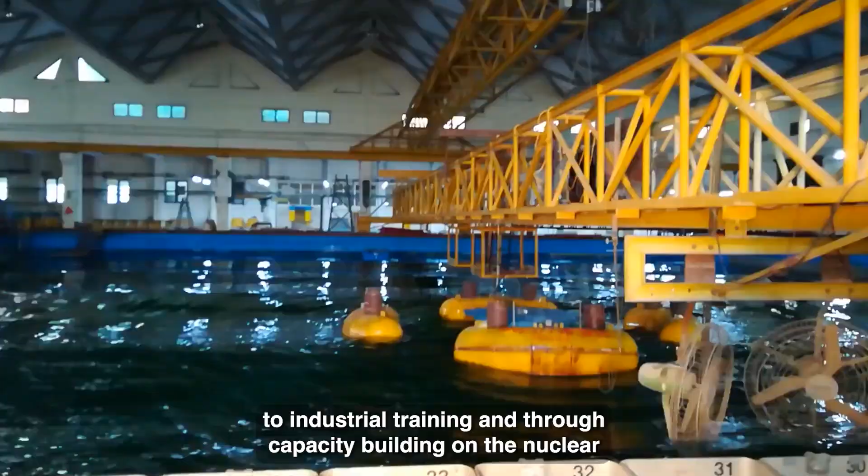This maritime engineering program is a very special, multidisciplinary program with input from mechanical, civil, structural, aerospace, naval architecture, chemical engineering, electrical, electronics, and applied mechanics. It is completely dedicated to industrial training and thorough capacity building in the new trade of the maritime sector. It's a growing economy offering many job opportunities and research frontiers as India grows, and the Blue Corridor initiative planned by the Government of India is one important mission requiring maritime engineering growth in the country. This program caters to that expected capacity building.

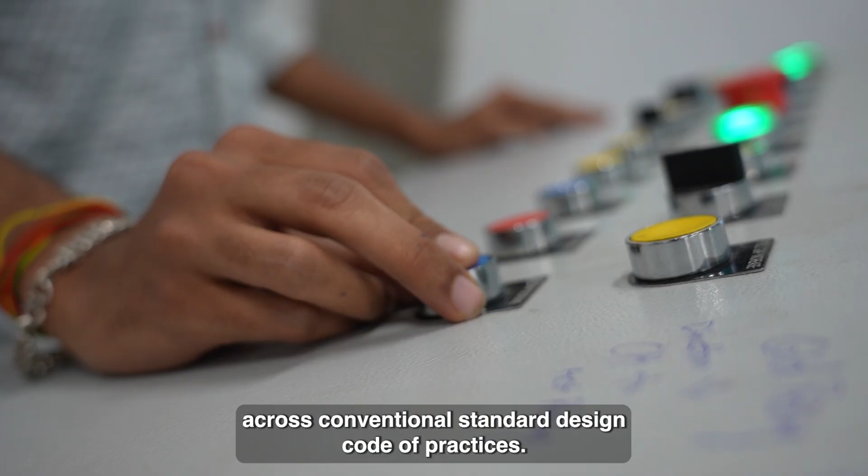This is part of the material science engineering laboratory, which serves as a teaching aid for the maritime engineering program. When we talk about materials innovation in the maritime industry, concrete and steel have been conventional choices for engineers, but now we have titanium vessels and high-speed craft boats made of fiberglass. These are advanced materials that do not fit conventional standard design codes of practice. We conduct box furnace tests, tube furnace tests, vacuum arc melting, induction melting, vacuum induction melting, and vacuum sealing, all present in this laboratory, which is a small segment of the material science laboratory.

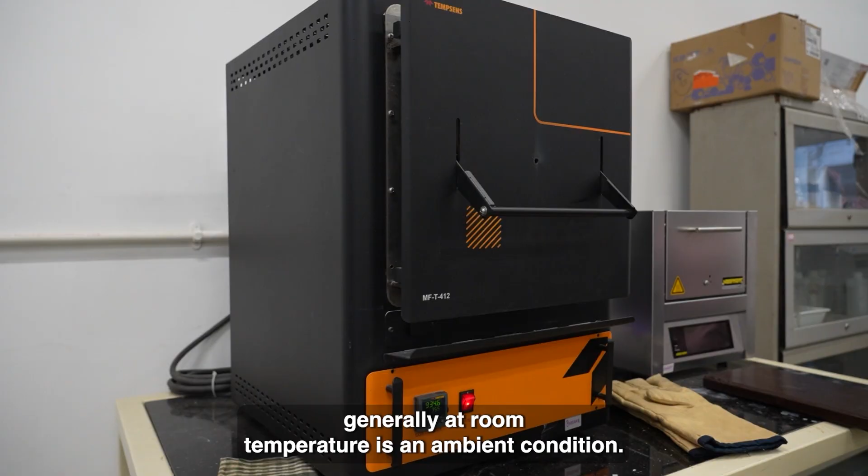A typical furnace here can reach operating temperatures as high as 1200 degrees Celsius for testing specimens. Generally, at room temperature and ambient conditions, mechanical properties do not alter much. As you'll see in the course lectures, the strength of a material degrades when the temperature rises beyond 600 degrees. Therefore, when designing for fire resistance, you must choose an alloying element such that the strength doesn't degrade beyond 600 degrees Celsius.

Welcome to the ambience of the IIT Gandhinagar lecture theatre. This is one of the interesting classrooms where maritime engineering classes will be conducted. We have state-of-the-art projection facilities and good audio-visual recording systems. Once a lecture is over, the system can generate PDF files of the lecture directly, and these can be emailed directly to your email ID. It's a state-of-the-art facility at IIT Gandhinagar where lectures are recorded for life and shared with students immediately.

This is the IIT Gandhinagar library. It has collections of books referred to as standard textbooks and references for the course and program. It also has many online editions of design codes of practice, reference materials, and e-collections of various video lectures from international courses and programs related to maritime engineering.

We will now take you around the advanced material manufacturing units, so you will see the state-of-the-art facilities available at IIT Gandhinagar. Welcome to the program to join MTech and PhD at IIT Gandhinagar Maritime Engineering. Please try to enjoy and take advantage of this to the maximum. Welcome to the program, and welcome to IIT Gandhinagar.

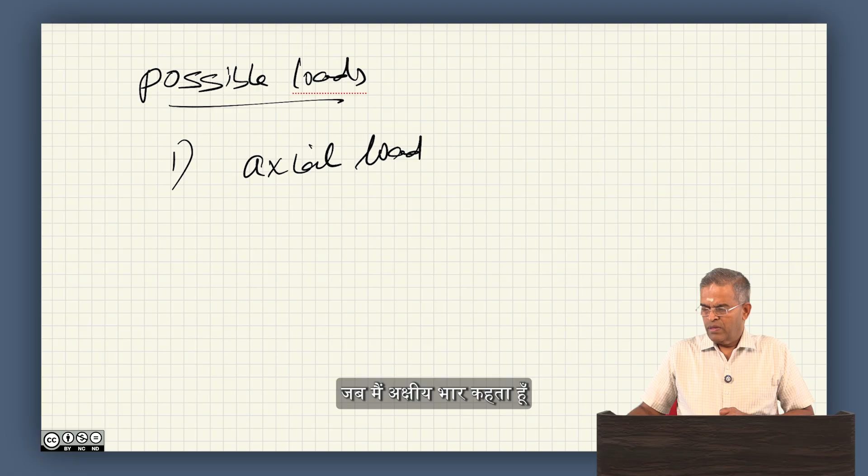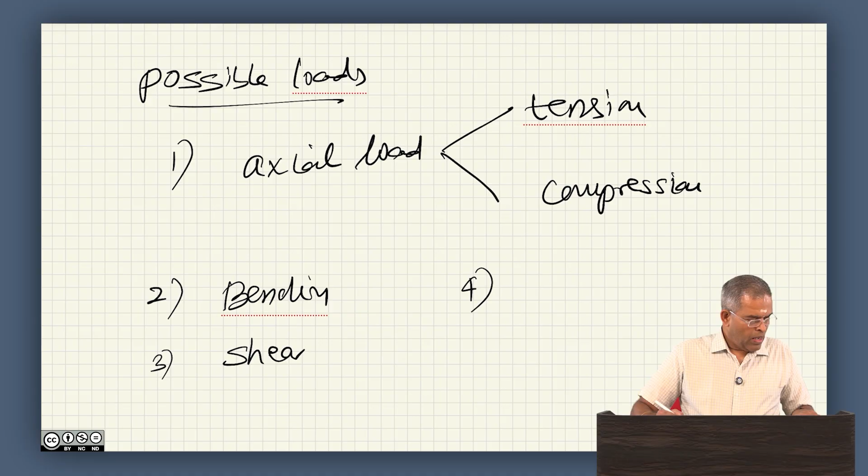What are the possible loads a member can experience? A member can experience axial load, which includes axial tension and axial compression. It is interesting to note that the design aspects of members under axial compression differ from those under tension, because in compression, buckling comes into play, whereas in tension such issues do not arise. The second type of loading could be bending, the third could be shear, the fourth could be hydrostatic pressure, and the fifth could be buckling stress, or hoop buckling stress.

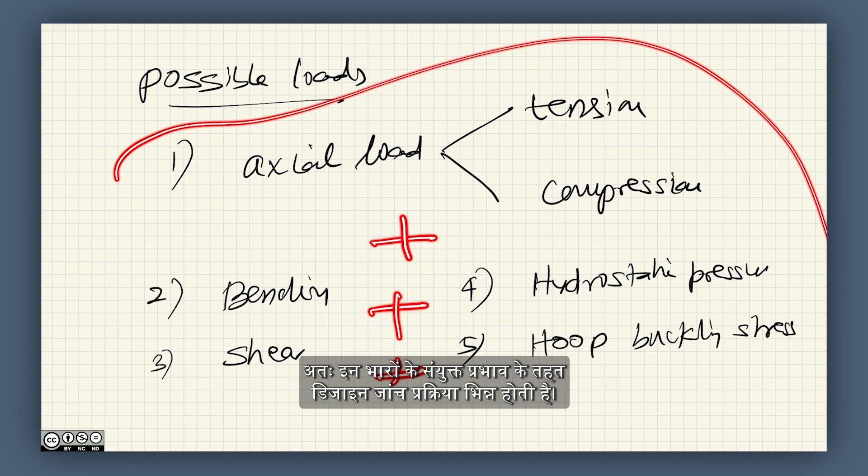The design issues related to these kinds of behavior under different loading need to be looked into in detail if we are to understand the design of members under this kind of loading. Incidentally, these loads can also be combined, and under combined action the design check procedure is different. Citing one international code, the American Petroleum Institute recommended practice for design, we are using API RP 2A, which is essentially used for working stress design.

Let us talk about the design methods. There are two kinds of design methods popular in the literature: one is what we popularly call the allowable stress method, and the other is limit state design.

In the allowable stress method, the load is estimated based on historical data for a specific weather window and sea state. The load effects caused by these loads are estimated based on structural mechanics principles, and then we apply a suitable factor of safety to the overall strength of the member. This procedure in a nutshell is embedded in allowable stress method design.

Whereas alternatively, the limit state design method uses a probabilistic approach. The moment we say probabilistic approach, we start characterizing the loads as well as the strength by some factors. This is not a new procedure.

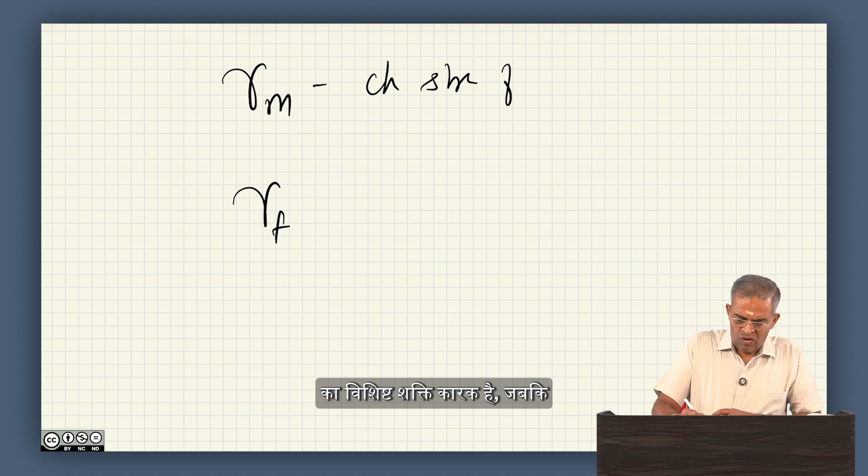Even in limit state design method applicable to concrete structures as practiced in IS 456, and also limit state design method as practiced for steel in IS 800 Indian Standard Codes of Practice, we have already learnt about these probabilistic tools, where we say characteristic strength of material and characteristic strength of loads. Their factors are gamma m and gamma f, where gamma m is the characteristic strength factor of material, and gamma f refers to the characteristic strength factor for loads.

So anyway, this follows a probabilistic approach of design; it is nothing new. Limit state design follows a probabilistic approach, using characteristic variation of loads and materials. We call the material strength as resistance—that is the difference we introduce in this code of practice.

Loads will stand as loads, whereas strength of material is referred to as resistance offered by the structure. As usual, we have load factors and resistance factors, gamma f and gamma m, which are applied to the material or resistance and to the loads on the structure to obtain the characteristic variation of these values, and then they are applied onto the structure to check or prepare the design procedure.

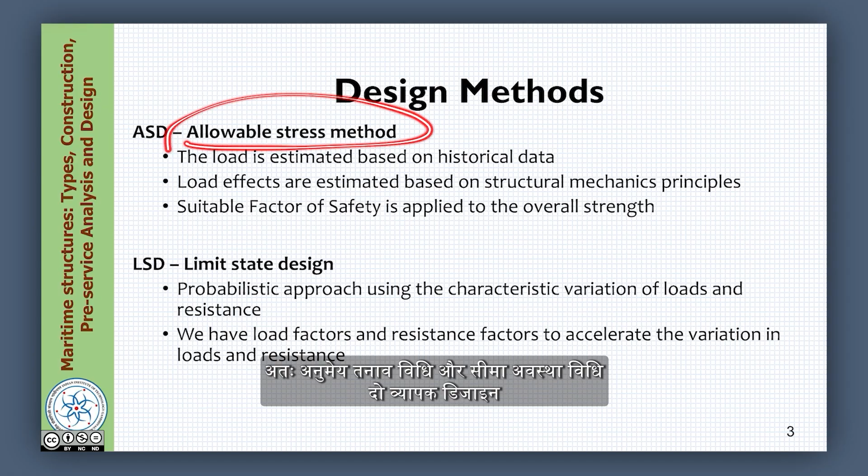So allowable stress method and limit state method are the two broad design methods practiced in maritime structures, especially in steel structures. Let us look at both of them in detail before we take up equations governing these design factors.

Let us talk about allowable stress method design. Whenever you talk about a design procedure, there are two quantities to be compared: one is what we call demand, the other is capacity. A design is said to be safe when the capacity exceeds the demand.

When the capacity of the material or structure exceeds the demand imposed on the structure, we call this design procedure safe. At worst, it can be equal, but the capacity cannot be lesser than the demand, as that would cause failure to the structure. So the two parameters of paramount importance in design are capacity and demand.

Let us see what the demand is in this method. The demand comes from the loads actually—the applied stresses caused by these loads on materials or members are calculated based on the principle of structural mechanics. So we do a complete analysis of the structural system, subjecting these loads onto the system. The loads can be wave loads or wind loads, which we discussed in detail in the previous lectures.

At any given point in space, depth and time, we know what wave load is imposed, and from the wave water particle kinematics we can compute the wave loads. Similarly, from the 1/7 power law we can compute the wind loads. Once we know the wave load and wind load, we can calculate the stresses on the members and support conditions based on the principle of structural mechanics.

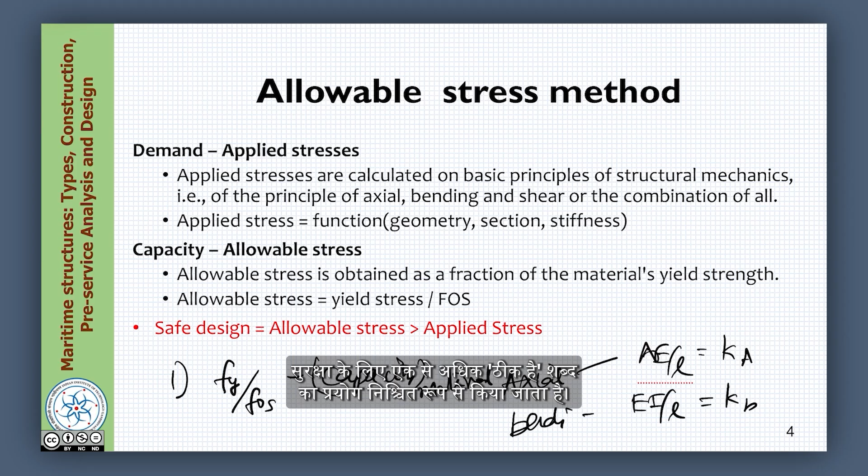So, in the allowable stress method, the important parameters we must understand are two things. One, yield strength is divided by factor of safety to get capacity of the material. So, we do not use the full strength of the material in design. We divide it by a number. Factor of safety is definitely more than 1. So, we divide it by a number.

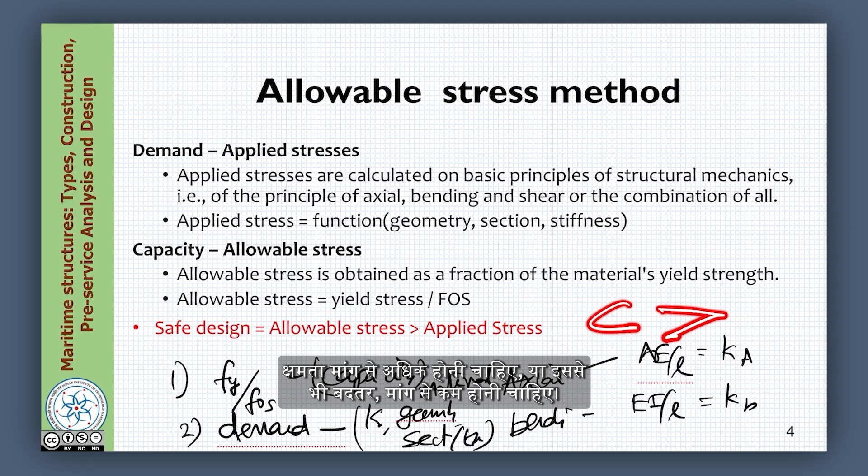The second point, the demand estimate is based on the stiffness of the member, the geometric configuration of the member, and the section and its thickness. So, I can now say demand is more or less a geometric driven or geometric dominant property, while capacity is more or less a material driven property. So, for a good design, capacity should exceed the demand.

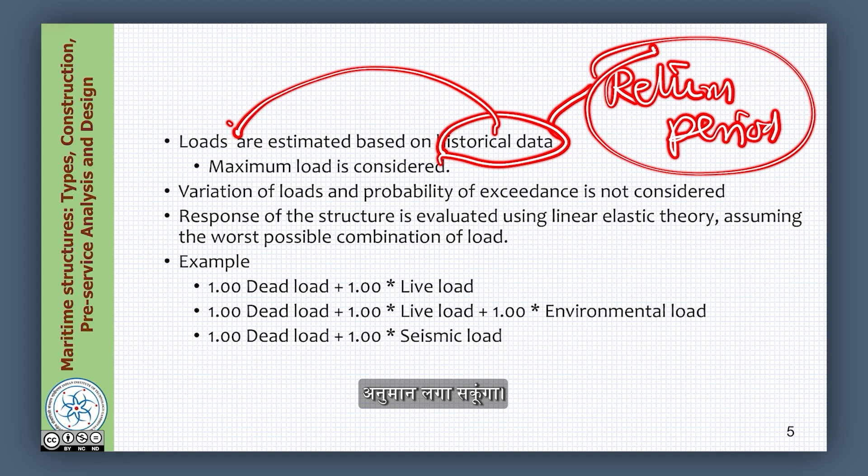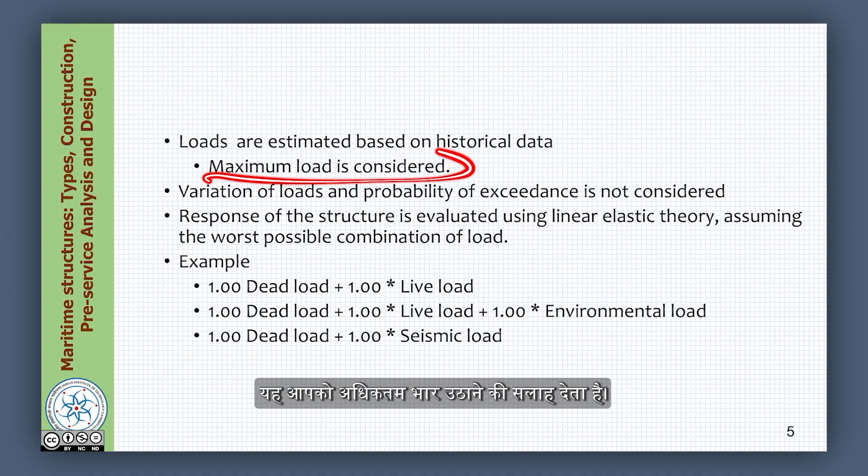So, amongst this historical data collected, this method advocates you to pick up the maximum load. That is important. Whether the maximum load will get repeated within the service life of the structure, this question is not attempted at this moment. From the historical data, pick up the maximum load and consider that as the demand.

However, loads also vary probabilistically, but in this method the probabilistic exceedance of the load is not considered. So, allowable stress method is a deterministic approach of design, not a probabilistic based method at all. Therefore, the probability of exceedance of any chosen design value within the service life of the structure is not part of the game in this design process. That is about the loads.

Now, once the loads are applied to the structure, I will do detailed analysis to compute the stresses. It can be bending stress, shear, axial, torsional, etc. To compute the stresses, I need to know the structural system and the cross sectional dimensions and the member thickness. I find the response of this using elastic theory.

So, this method of design is purely elastic because it does not promote any permanent deformation on the member as well as in the structural system. Based on the linear elastic theory, you can compute the responses. While doing so, assume the worst possible combination of loads.

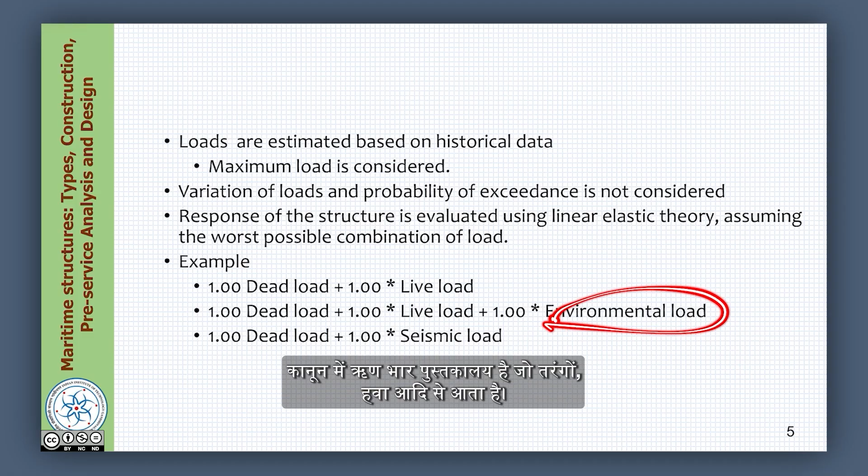Now let us take for example, what combination do you consider? If you have dead load and live load, you actually add them. If you have dead load, live load and environmental load which comes from waves, wind, etc., simply add them. If you have dead load and seismic load, add them. These are examples. However, the factors of multiplication of these vary depending upon the advice offered by different international codes of practice. We will see them in detail when we touch upon the design example.

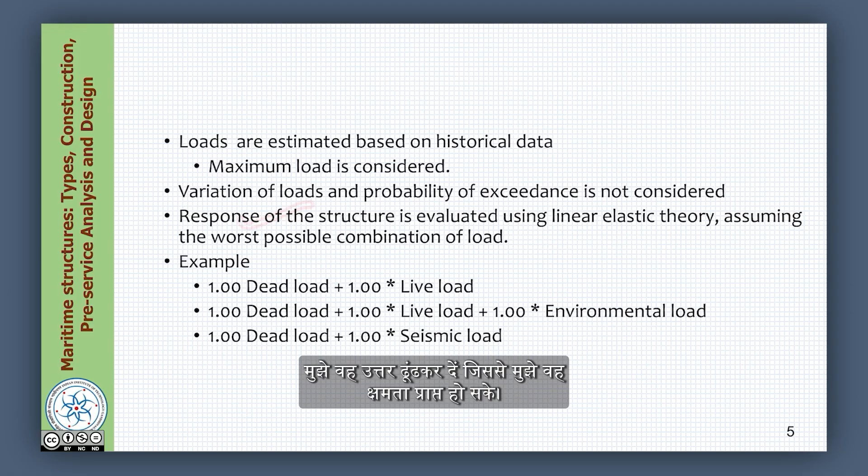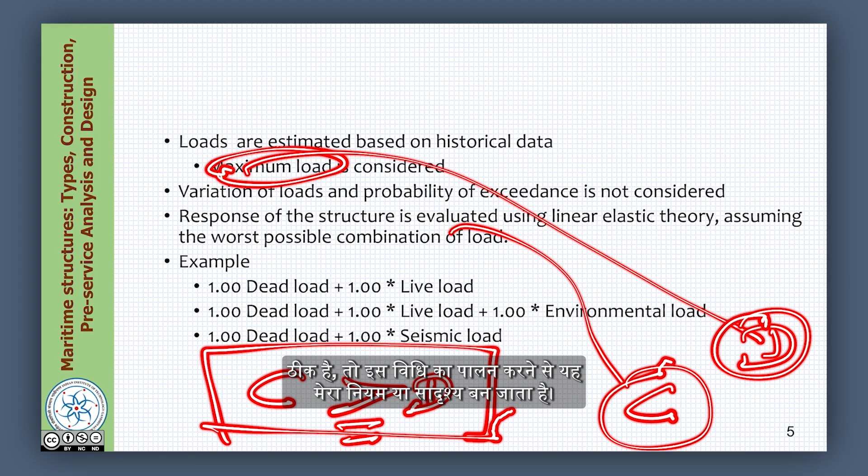Let us see what is the design procedure for this. The design loads are defined as the maximum loads that occur during the lifetime. How do you get this? You look at the historical data available from the site specific load conditions, etc., to get the maximum loads. The load effects are considered based on the elastic principles of mechanics. Then the resistance is computed using design strength capacity of structural elements. Then one can compute the allowable stresses in axial, bending, shear, torsion, etc. Then we say that the capacity should exceed the demand.

Let us talk about the other method, which is the load resistance factor design method, where the demand arises from the design loads. Now in this method, the loads are obtained based on probability of exceedance. I can give an example. What do we understand by probability of exceedance? We already saw that.

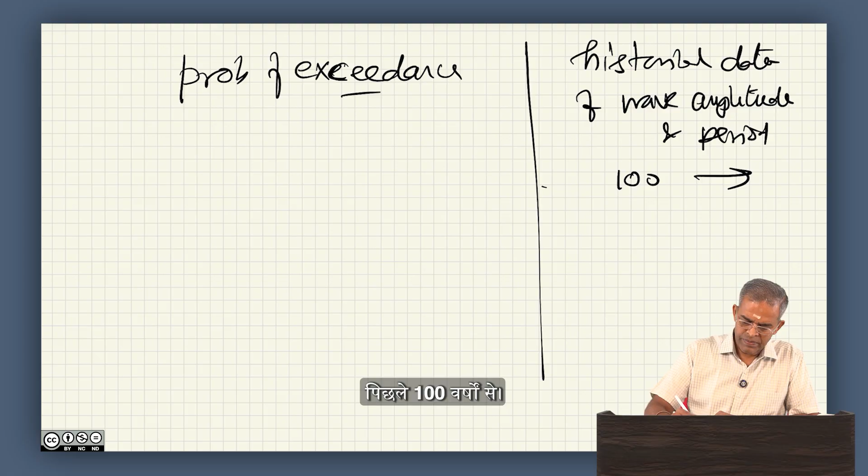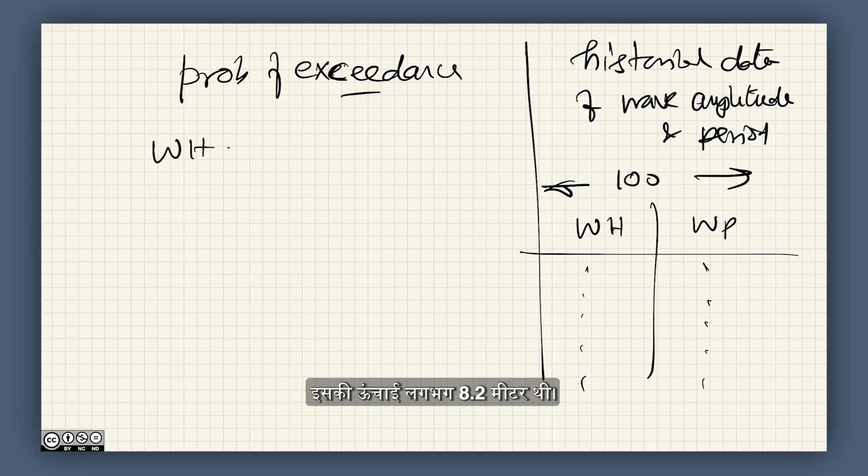Let us say you have historical data of the past - historical data of wave height, that is wave amplitude, and wave period, for the past 100 years. So wave height, wave period - you have the data. What you do is pick up the maximum value. Let us say the maximum available here, wave height was about 8.2 meters, and the corresponding period. You cannot pick up a wave height value and a wave period value independently; there should be a correspondence between these two. So the corresponding wave period is about 10 seconds.

You picked up this value, but this method says you cannot apply this load directly. You must also find out what is the probability of exceedance of this load in the past. For example, if this combination has occurred only once in 100 years, then the probability of exceedance is practically close to 0. You should not pick up that kind of value where the probability of exceedance is very minimum. Usually people look for a probability of exceedance of not more than 5%. So 95% of the time the load does not exceed, 5% of the time it can exceed.

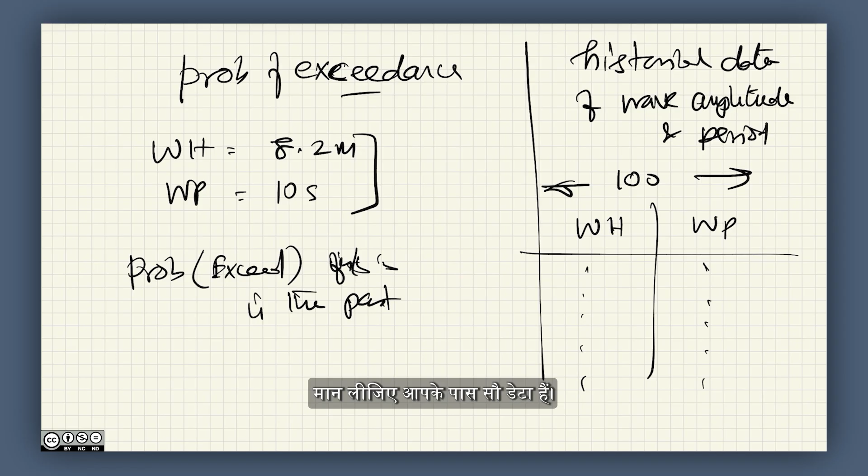For example, in a given data of 100, 5 times this value can be exceeded. Suppose you have 100 data points, and you have chosen wave height of 5 meters and 6 seconds. In this 100 data, this combination was exceeded about 4 times. So you can take this value as the design load, a design wave, then compute the load this way.

So this method estimates the loads based on probability of exceedance, using the characteristic distribution of each type of load. Remember friends, the characteristic distribution of each load is not the same. The dead load's appearance, repetition, or exceedance can be different from the earthquake load, different from the wave load, etc. So the load factor assumed can be different for different kinds of loads. So assume and compute this for different classifications of loads, pick up that combination, and obtain the design load.

That is about the demand. Let us come to the capacity. Capacity is a resistance offered by the material through the member, through the structural form. It is purely based upon the yield strength of the material only.

Remember, in the previous design case, we said yield strength is not completely used, we have taken a fraction of that. The permissible value was actually yield value by factor of safety. We reduced the yield value and took that as allowable stress in the material. But here you can use the full yield strength of the material.

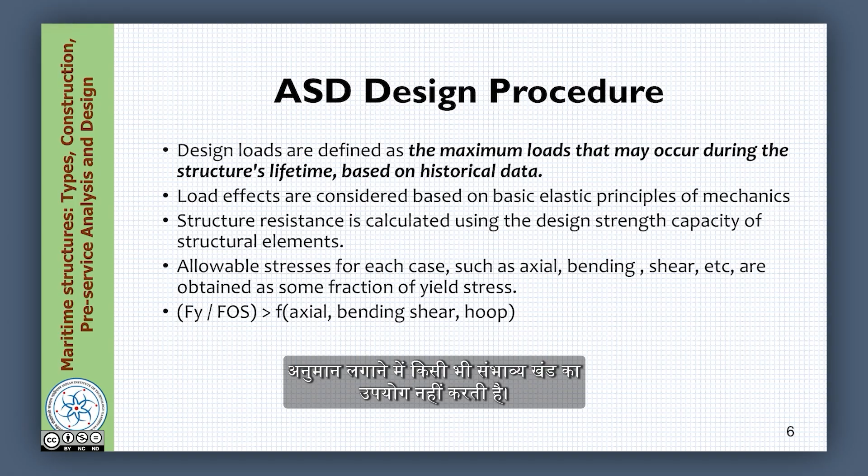So allowable stress design method does not use any probabilistic aspect in estimating neither the demand nor the resistance, whereas in LRFD it permits the probability of exceedance of any specific event to compute the demand as well as the resistance.

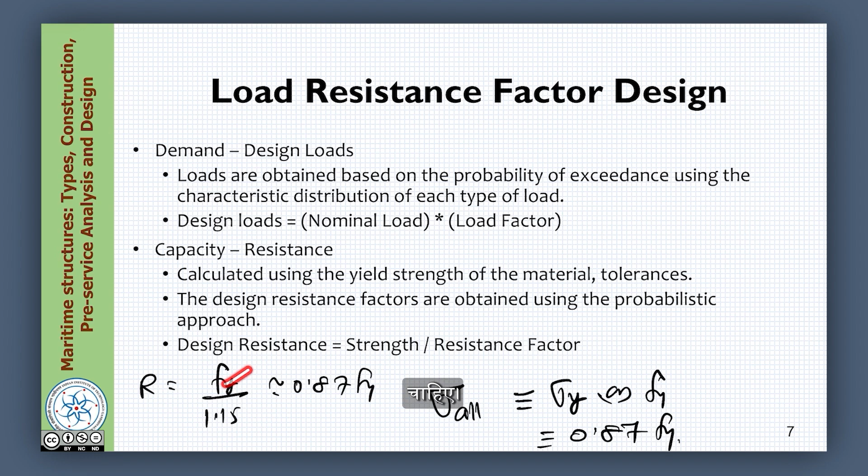One may ask me a question, why should this factor be applied for the material? You know, material needs to be homogeneous, isotropic, uniform thickness manufactured, and you should have the same quality control for the entire batch of production. But you will notice that for the entire batch of production, there is always a standard deviation in the quality of their characteristic strength.

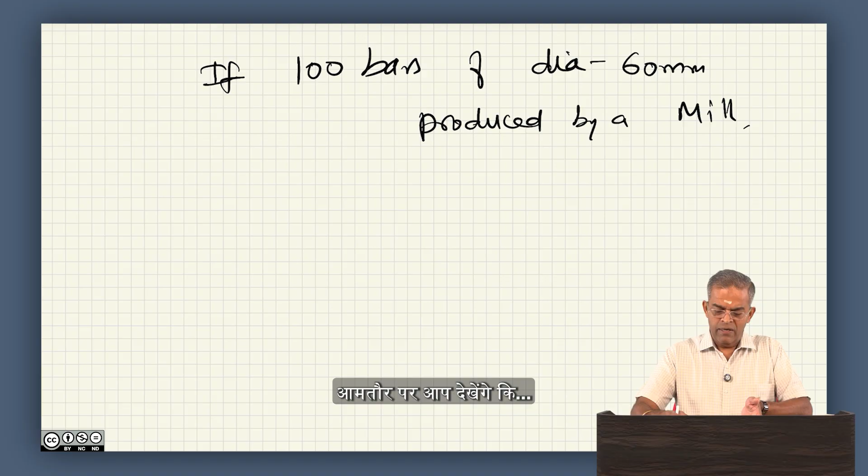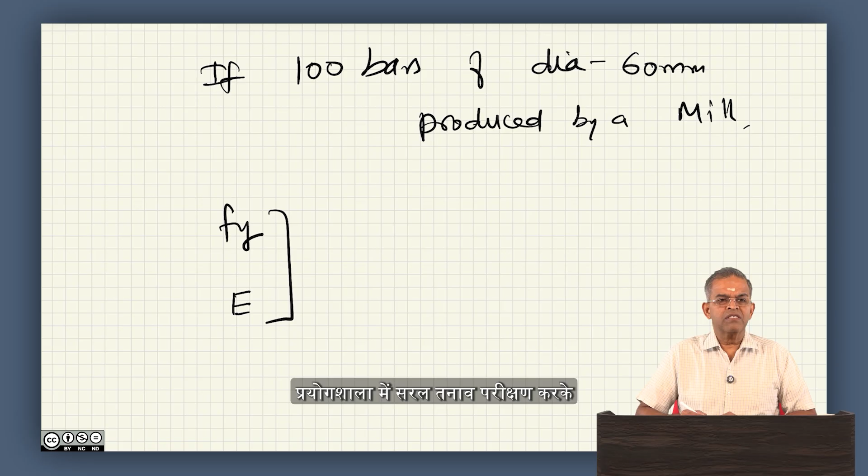For example, if let us say 100 bars of diameter 60 mm are produced by a mill, usually you will notice that the yield strength and modulus of elasticity, which are the two pioneer properties of the material obtained by conducting a simple tension test in the laboratory, do not satisfy all 100 samples.

So the acceptable limit is that more than 95% of the samples should pass a value equal to the sigma y and E taken for the design. For example, if you have taken sigma y or Fy as 350 Newton per mm square and E as 2.1 into 10 power 5 Newton per mm square as your design value, then if you test 100 samples, conduct simple tension tests, and compute Fy and E, 95% of them should exceed this.

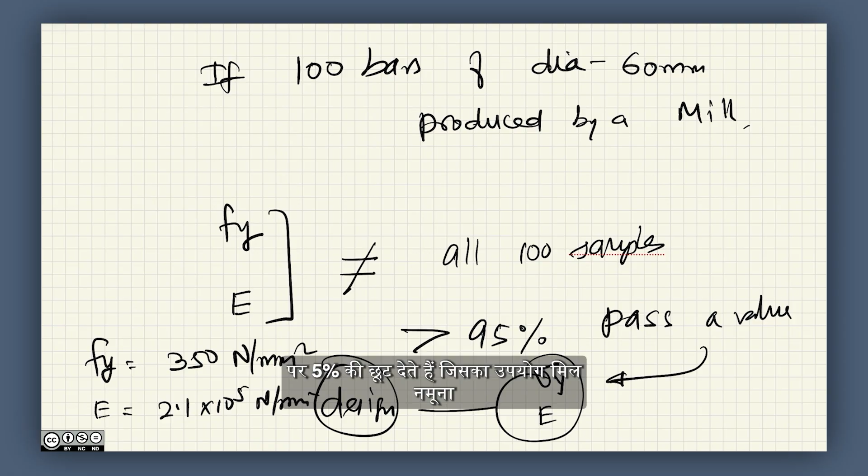Then you can take this value as the strength of the material. So only 5% of the sample can fall below this. That is the requirement of accepting this as a manufacturing sample. Now, when we deliberately allow 5% concession on the quality control used by the mill to produce a specimen, I cannot use this Fy as such.

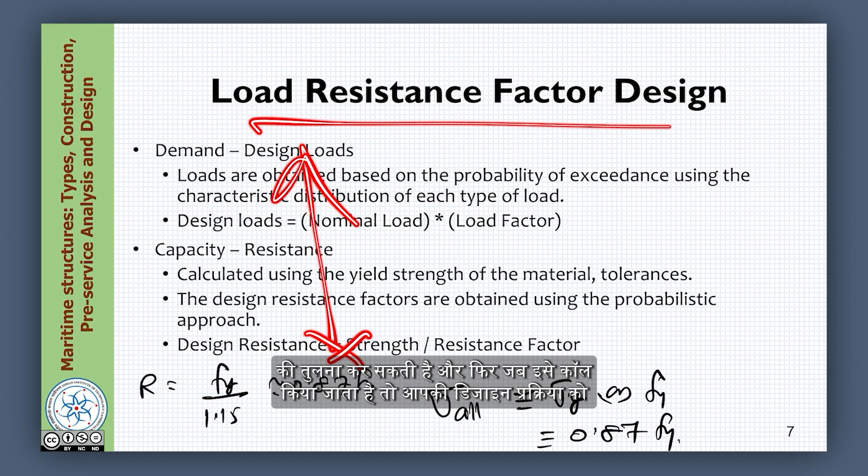What if that rest 5% lot from the manufacturing sample has reached the site and you are using them for construction? To take care of that, we use a factor here. So resistance can be computed based on this method, demand can be computed based on probability of exceedance method, we can compare these two and then frame a design procedure, and that is called LRFD.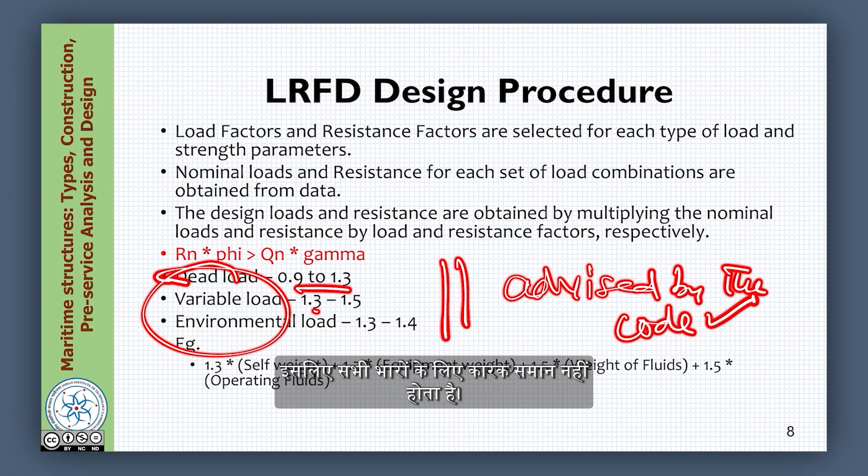For all loads, the factor is not the same, that is the point here. So you compute the nominal loads and nominal resistance for each set of combination. The design loads and resistance are obtained by multiplying the nominal load and the resisting load by a factor, and this factor can be different for different kinds of loads.

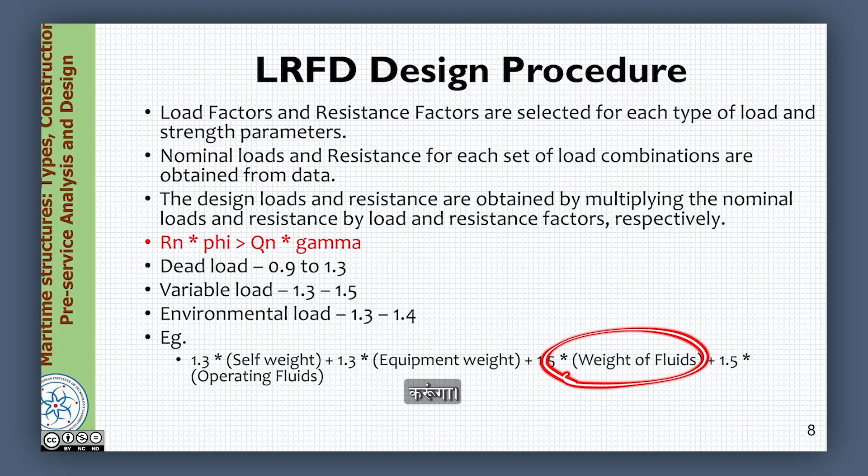For example, if I look at dead load, I will multiply 1.3. If I look at machinery load, 1.3. If I look at any sloshing effect of fluids, I will use 1.5. So for different kinds of loads, I will use different factors. I can easily compute the design load and design resistance by multiplying the nominal load and nominal resistance obtained from the parameters with a factor.

So now I have design load and design resistance, then I will compare capacity and demand and frame the design procedure. Now, let us try to apply this method to a tubular member for a design procedure.

What are the different kinds of stresses a tubular member can experience? One is axial stress, which is simply load upon area, be it tensile or compressive. Bending stress is M by I into y. It is very important, friends. Let us take a beam.

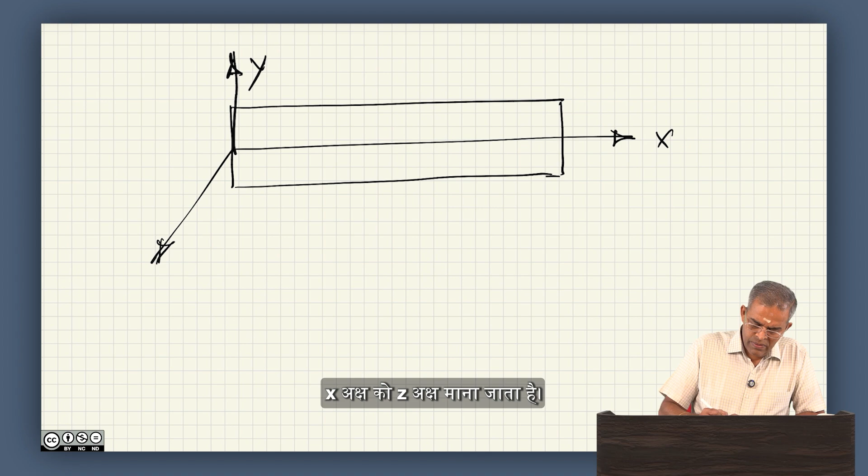Let us say this is my x axis, anti-clockwise is taken as y and clockwise is taken as z axis. This is 90 again, this is 90 again. Let us say this member has a cross section of B versus H.

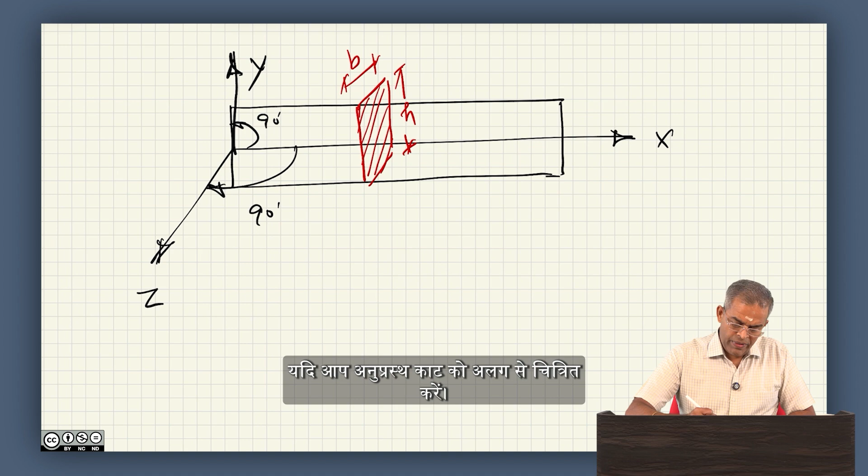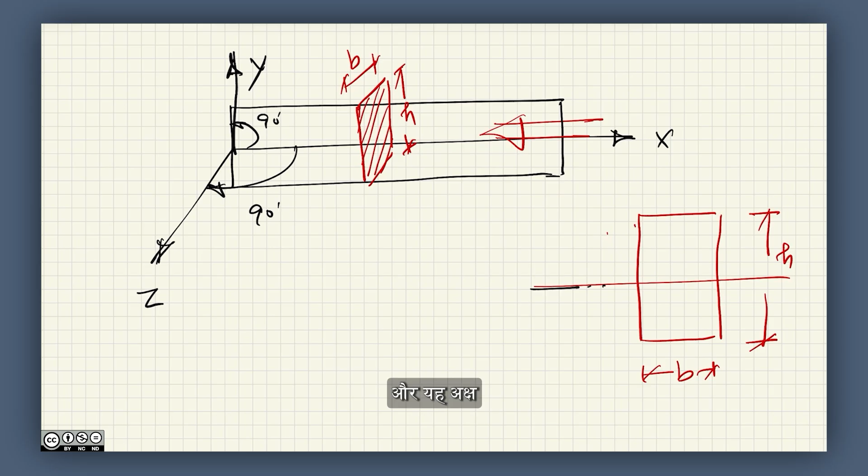Now if we take the cross section and draw it separately, when you look at this from this view, this becomes my H and this becomes my B, and this axis now becomes the ZZ axis, am I right? And this axis now becomes the YY axis, am I right?

Now I can find Izz, which is essentially BH cube by 12. I can also find Iyy, which is essentially HB cube by 12. I can also find Ixx, which is about this axis. I will leave it to you how to get Ixx. It's a big question, but it is not similar to what we have here. Now these are two cross sectional axes.

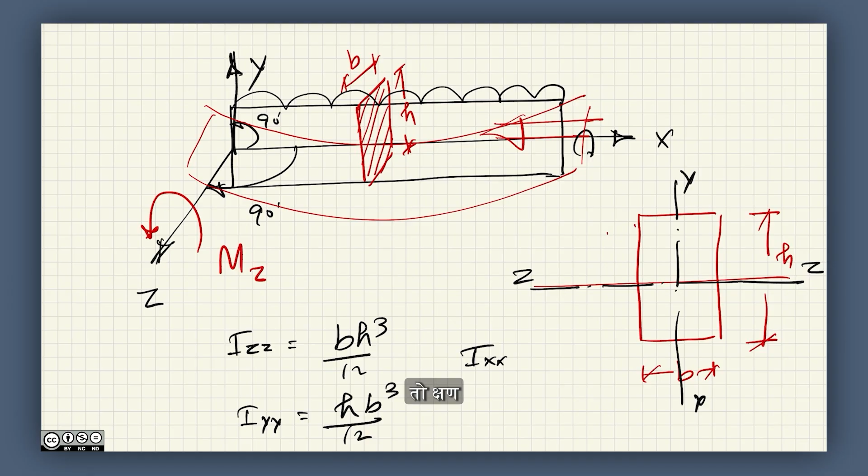When the beam is subjected to a loading, the beam will start bending. Now the moment applied is about this axis, so the moment is Mz, moment about the z axis.

So if you say the bending stress is M by I into y in general, I must clearly say it is actually equal to Mz by, about which plane this is bending. Now this is the plane or axis about which the beam is bending. So I should use Izz, and y will be the distance measured normal to this axis. So I should say y.

Suppose I am looking for the beam bending in this direction. The beam is bending laterally, which happens in lateral torsional buckling, right. In that case, the moment is about this axis. So I can say sigma bending in this case, the bending is taking place about this plane, so I should say Iy. I must write here bending stress is Mz by Iz into y.

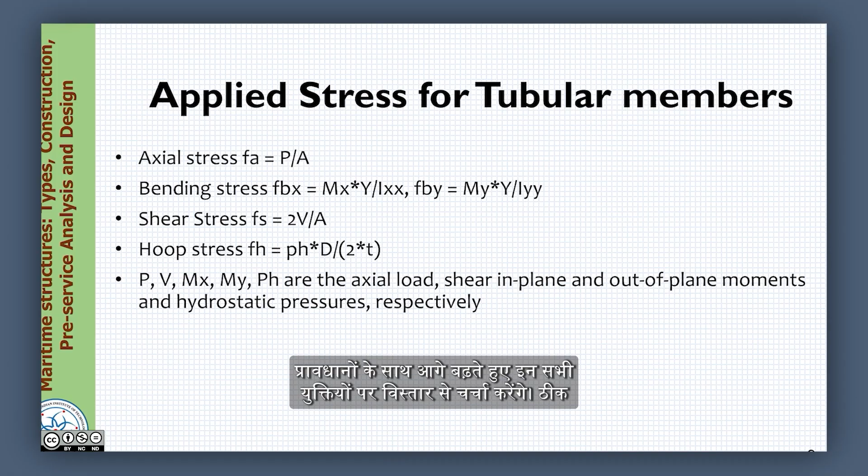I can also compute the shear stress, compute the hoop stress, and we will discuss about all these things in detail as we proceed further with the design code examples and provisions of the code. Now let us look at one by one.

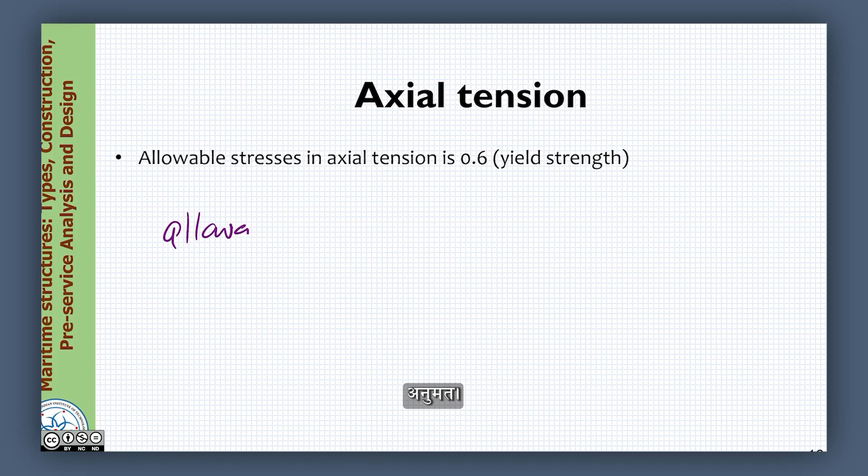When the member is under axial tension, how do we compute? So now I say the allowable tensile stress, which I can say as Ft, is only 60% of Fy. This is as per the design code of practice API-RP2A, clause 3.2.1-1. So we have this Ft as 0.6 Fy, only 60% is allowed. Of course, Fy is the yield strength.

Okay, generally it gives you stress in megapascal. Megapascal is very easy: mega is 10 power 6, and pascal is Newton per meter square. If I convert this to mm square, I get Newton per mm square. So megapascal is the same as Newton per mm square. Let us keep this in mind.

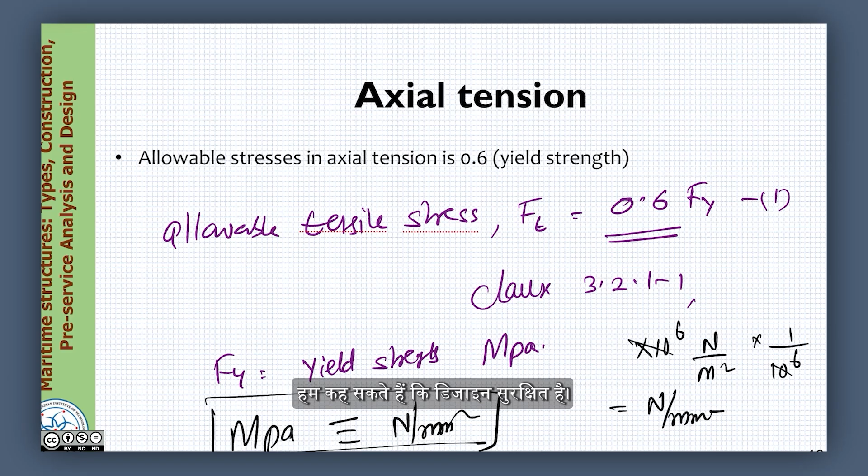No change, right. So in axial tension, I can compute the allowable stress easily using this equation. The actual stress coming on is simply computed from the loads acting on the member. I can compare the allowable stress with the actual stress, and if the allowable stress is higher than the actual stress, we can say the design is safe. Okay, that is about axial tension.

But friends, when you move on to compression, then the problem is tricky, it is not the same. For axial compression, first we must ensure whether the member will buckle.

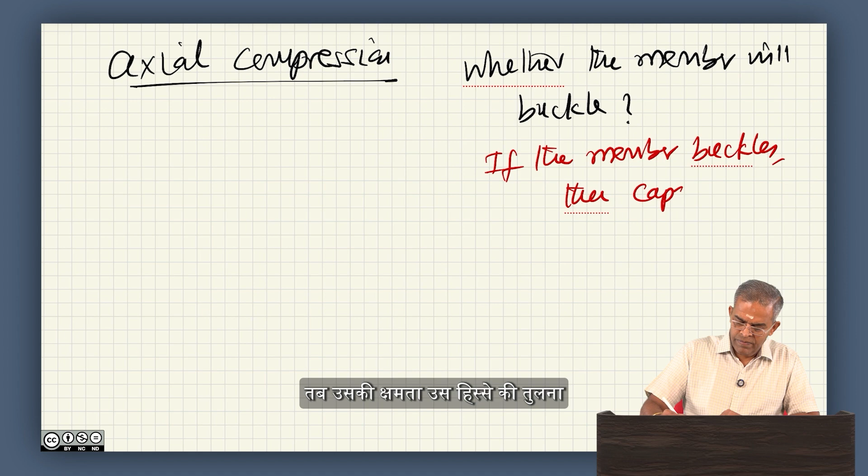One may ask me a question: why am I interested in finding out whether the member will buckle? Because friends, if the member buckles, then the capacity is much lesser than the member which does not buckle. So first I must ensure whether the member will buckle or not.

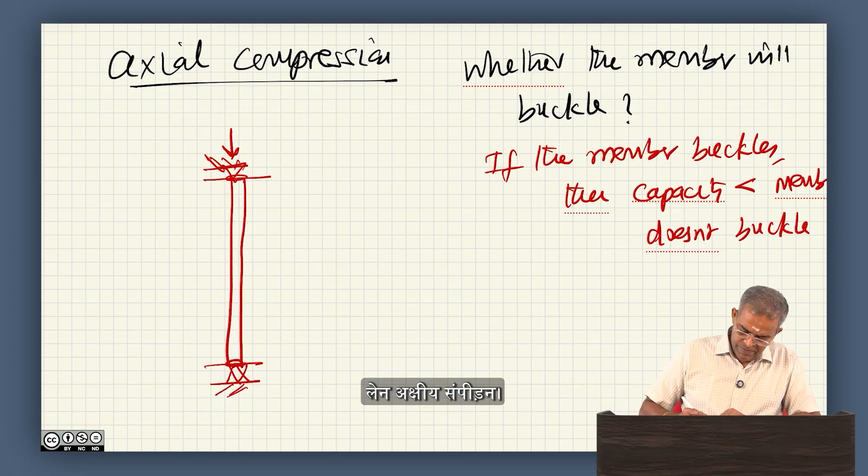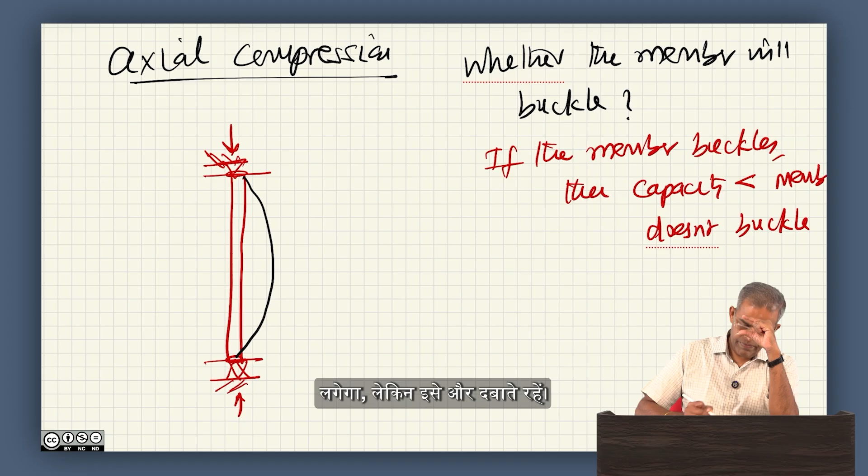One can ask me a question, why is this only applicable to members under axial compression? Take a member, a tubular member, put some boundary condition, apply axial compression. You will notice - take a matchstick, keep it within your fingers, try to press it. You will notice that the matchstick will start bending. If we keep on pressing it further, it will keep on bending further. A stage will come where the matchstick will break.

So this behavior depends on the cross section property of the matchstick. If you take a thick matchstick, you will not be able to break it at all. If you take a thin matchstick, you will be able to break it. So it has got some relationship with the diameter to its length. In column design, we call this the slenderness ratio.

So API classifies this slightly differently. It says first check whether the D by T ratio is greater than 60 or less than 60, where D is the external or outer diameter and T is the thickness. Check this ratio first. So friends, if the member chosen by you has got D by T more than 60, then it is not advisable to use that member.

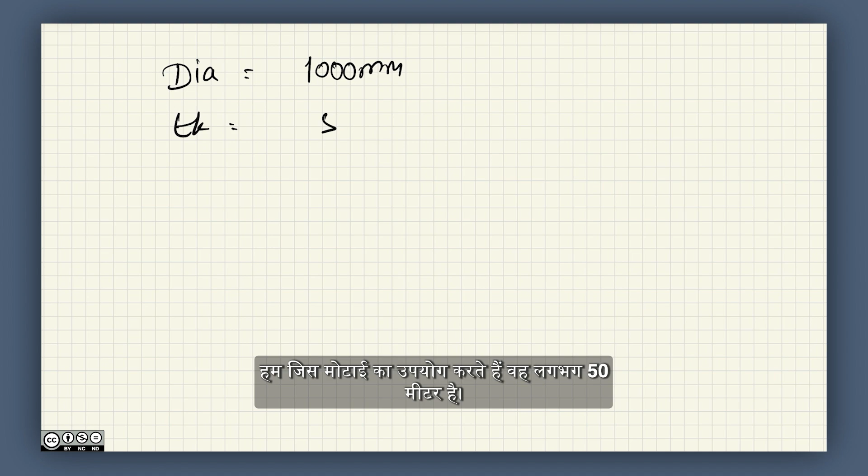Now let us take an example. A typical diameter of the column member in an offshore structure system is, let us say, about 1000 mm, and the thickness we use is about 50 mm. So let us compute D by T: that gives 20, so less than 60.

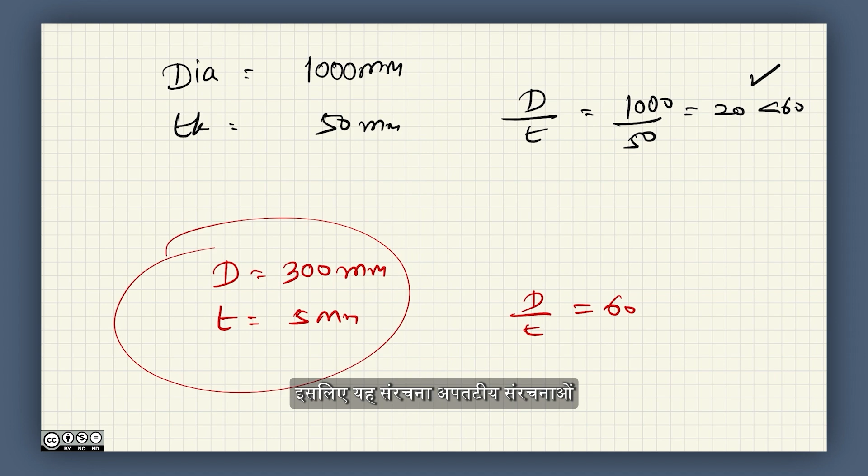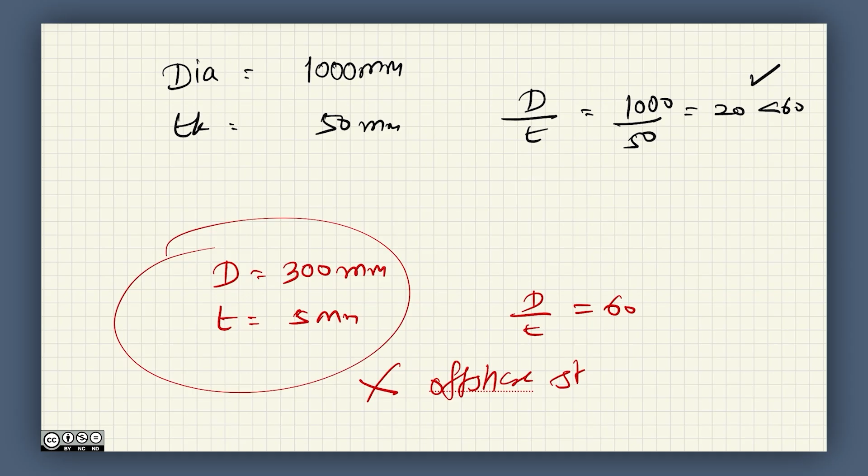If you take a member which is 300 mm and a thickness of 5 mm, you will see the D by T is touching 60. So this configuration is not good for offshore structures. One should first check the dimensions applicable for design. So API says first check D by T before checking the slenderness limits. If D by T exceeds 60, the procedure is different, but do not use it. If it is less than 60, go with that.

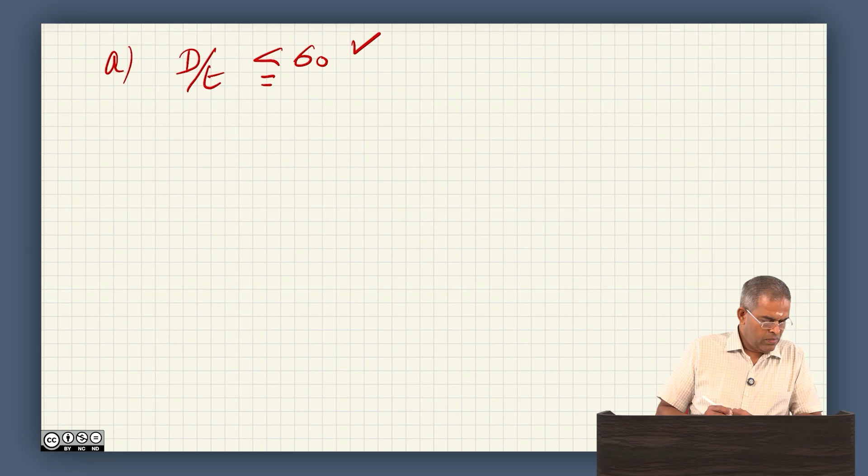Suppose let us say I have a member whose D by T is less than 60, or D by T is equal to 60. In that case, I have to compute the allowable axial compressive stress. I call this FA, and FA is given by...

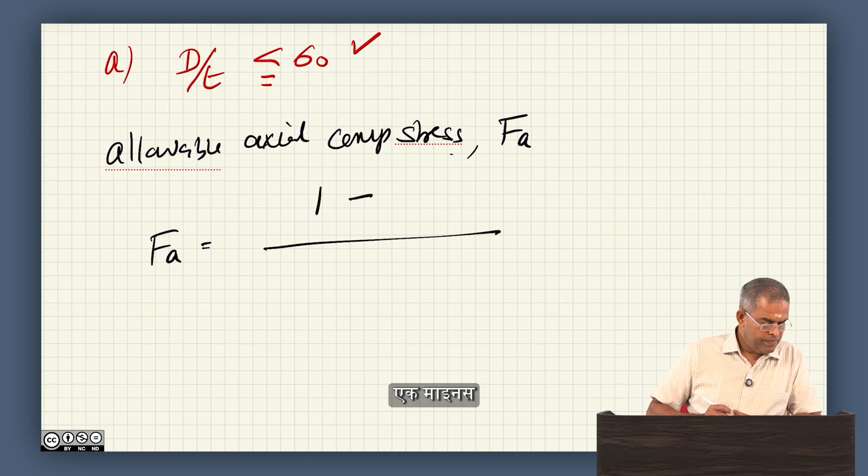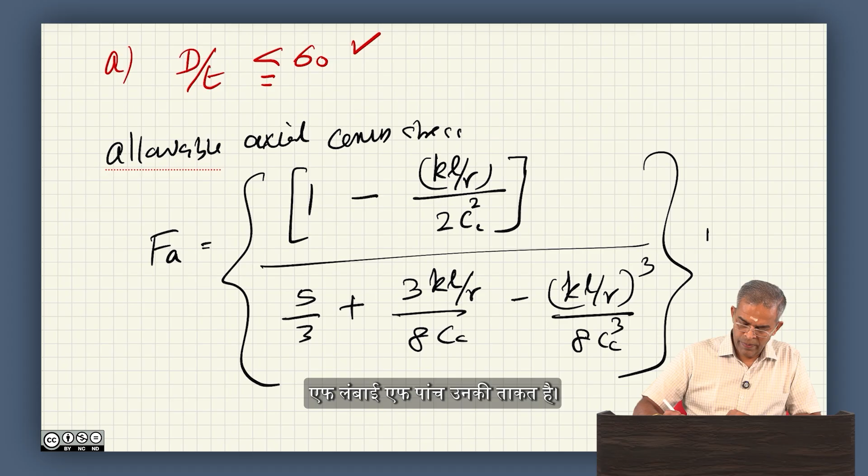1 minus KL by R square, divided by 2 Cc square, all divided by 5 by 3 plus 3 KL by R divided by 8 Cc minus KL by R cube divided by 8 Cc cube, times Fy, where Fy is the yield strength of the member. I multiply this factor to the yield strength - that factor is given by this equation. This is squared here, please make a correction, this is square here. Now let us see what is this KL by R business.

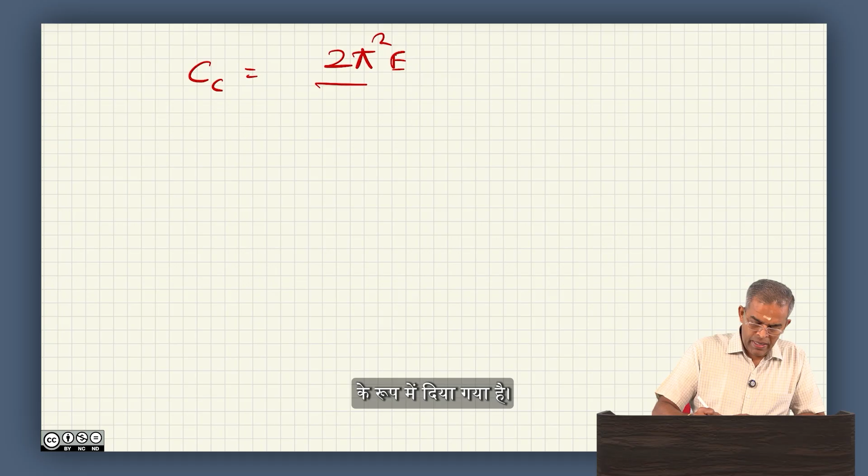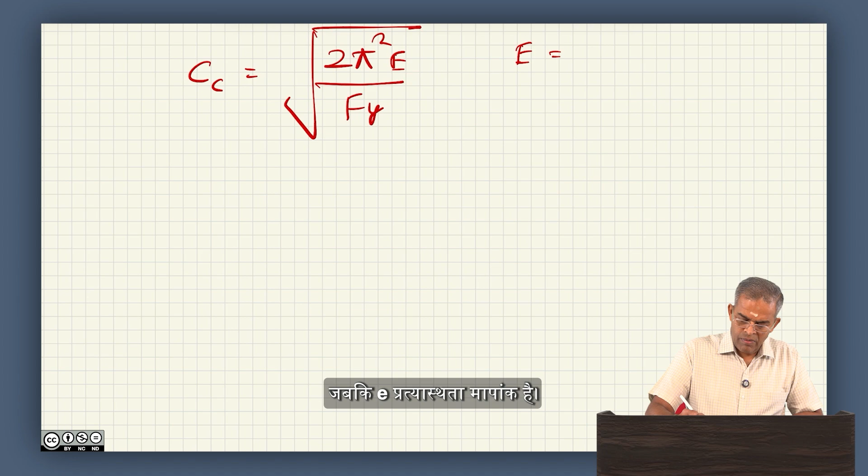Now this is true only when KL by R is less than Cc. So let us see what is Cc and what is KL by R. Cc is the critical slenderness ratio, given as the square root of 2 pi square E by Fy, where E is the modulus of elasticity and Fy is the yield strength of the material. So you know Cc. Then let us see what is KL by R - K is called the effective length factor.

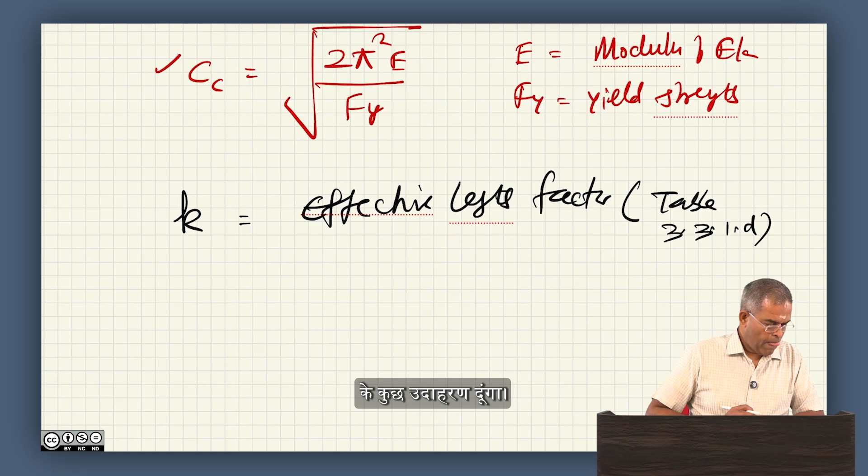Let us see what is this factor. This factor is given in table of section 3.3.1d of the code. I will give some examples.

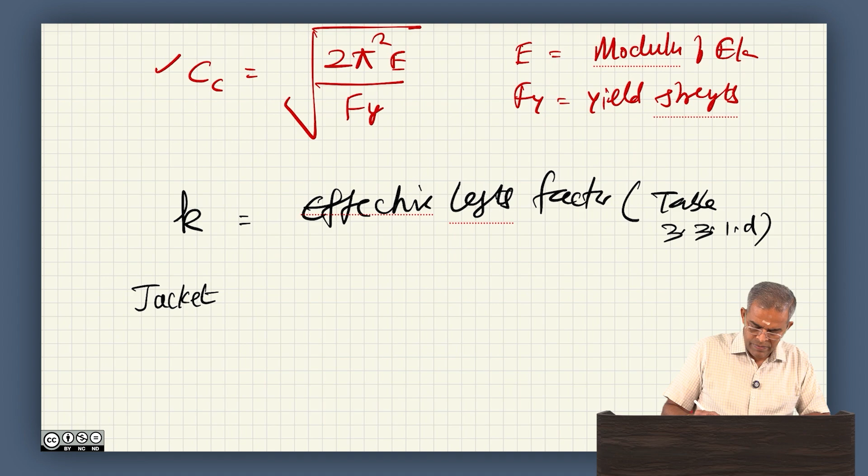If you are using jacket legs, then the effective length factor is 1.0.

If you are using deck truss web members, if you are looking for in plane action, then the factor is 0.8.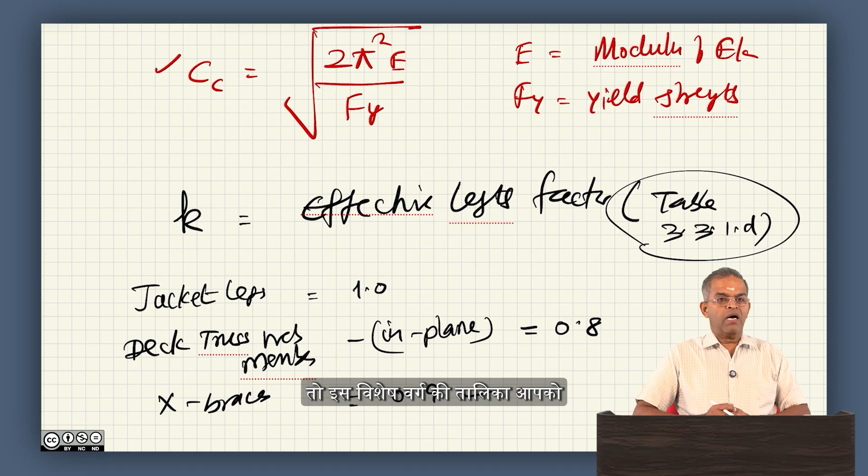If you are looking for X braces, then the factor is 0.9 and so on. So the table on this particular class gives you the effective length factor.

So we can always choose what actually you want, where L is called the unbraced length, R is called radius of gyration.

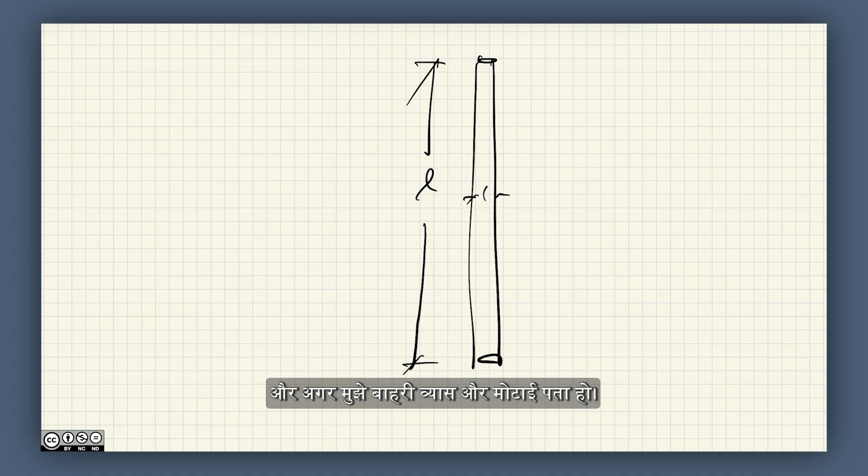So if I have a cylindrical member and if I know this is my unbraced length, and if I know the outer diameter and the thickness, radius of gyration is actually root I over A, and we know I for a circular member, which is pi d power 4 by 64.

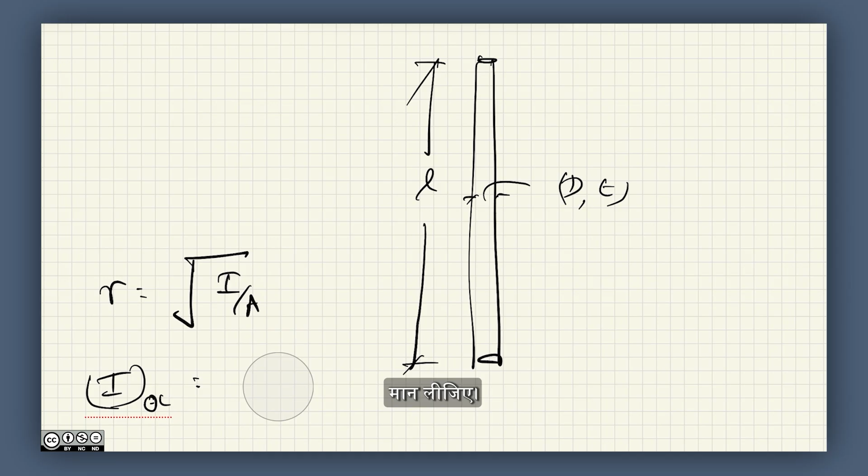Let us say pi d power 4 by 64, and area we know is pi d square by 4. We can always find R. If I know R, I can find KL by R because I know K.

If I know KL by R, I can substitute the value here and no problem with the numerator. It's okay, fine. We also know what is Cc. Cc is given here. So now what I do, I will first compute KL by R, compute Cc.

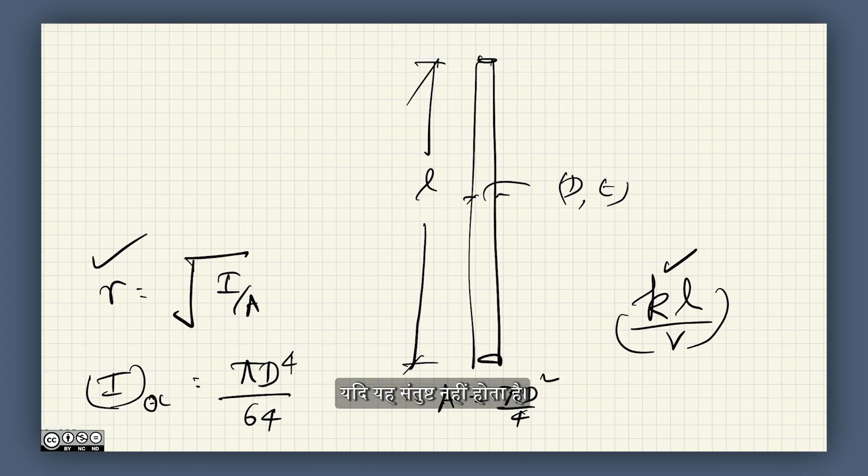If this value is lesser than or this equation satisfied, we will use this. If it is not satisfied, if KL by R exceeds Cc or equal to Cc, then the allowable stress is given by a different equation.

Let us say this is equal to now 12 pi square E by 23 KL by R square.

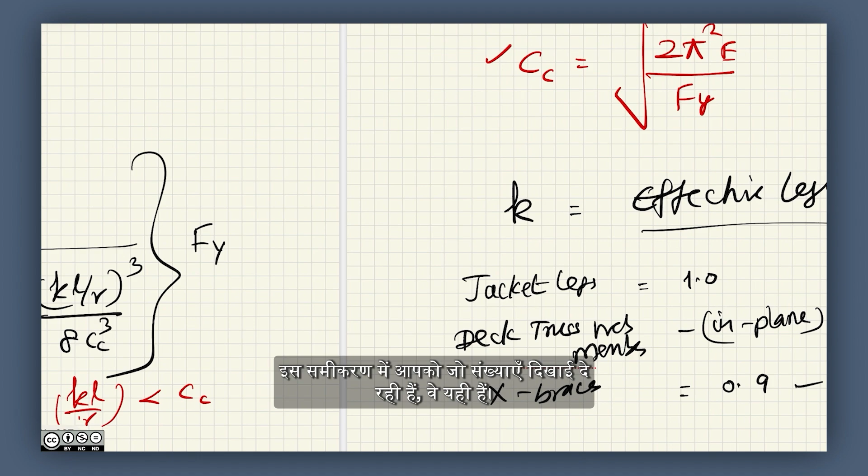Friends, you will notice that the numbers you see in this equation are all based upon empirical equations where extensive experiments and numerical analysis were conducted and the data were taken. These are all actually based upon experimental studies conducted by various researchers, and a debate has happened and this equation has arrived.

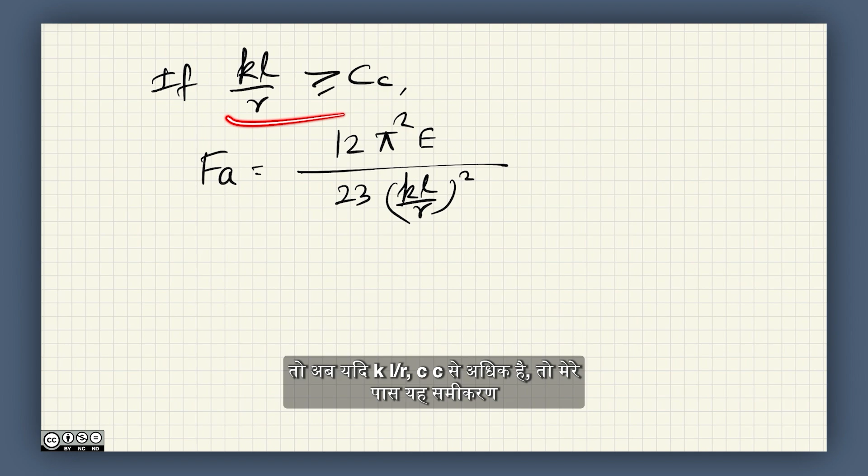So now if KL by R exceeds Cc, I have this equation to compute FA. If KL by R is lesser than Cc, I will use this equation to compute, where K is the effective length factor, L by R is explained and Cc is given. So one can easily compute the allowable axial compressive stress for column buckling.

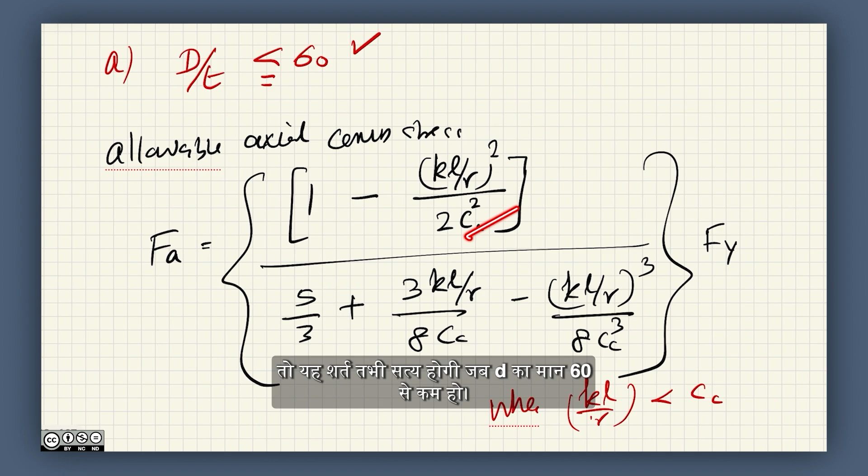Once we do this, the condition is true only when d by t is less than 60. If d by t exceeds 60, what happens?

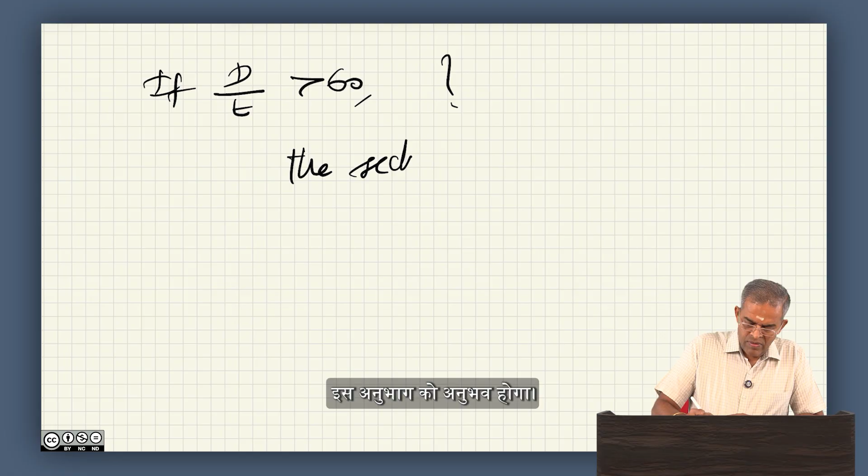If d by t exceeds 60, the section will experience local buckling.

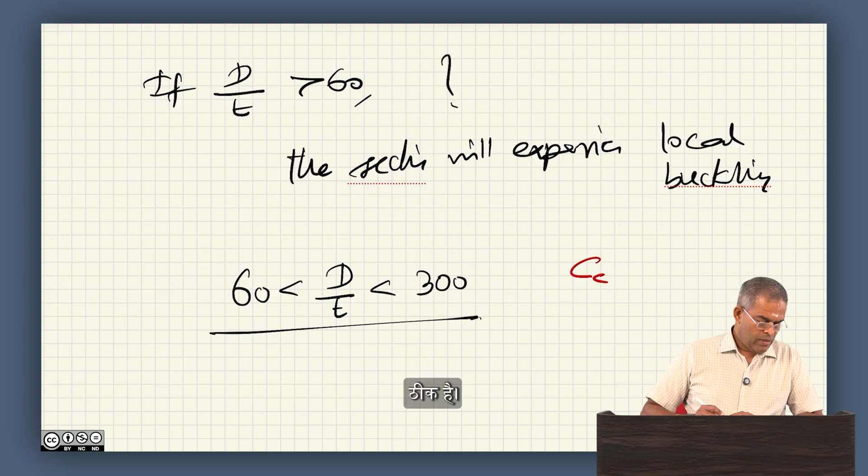When the section exceeds local buckling, then up to what limit I can allow this? So d by t should be between 60 and maximum 300. In such cases, the critical stress Cc, what we are using in this, should be replaced. Let us see how we replace this in the next lecture.

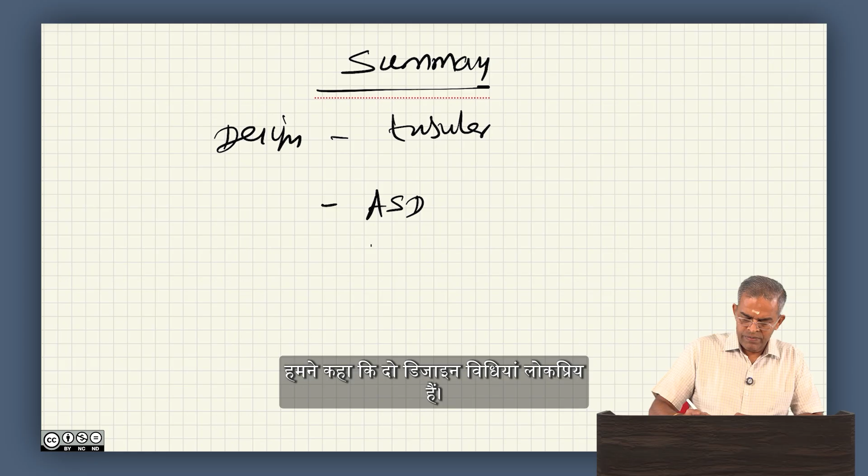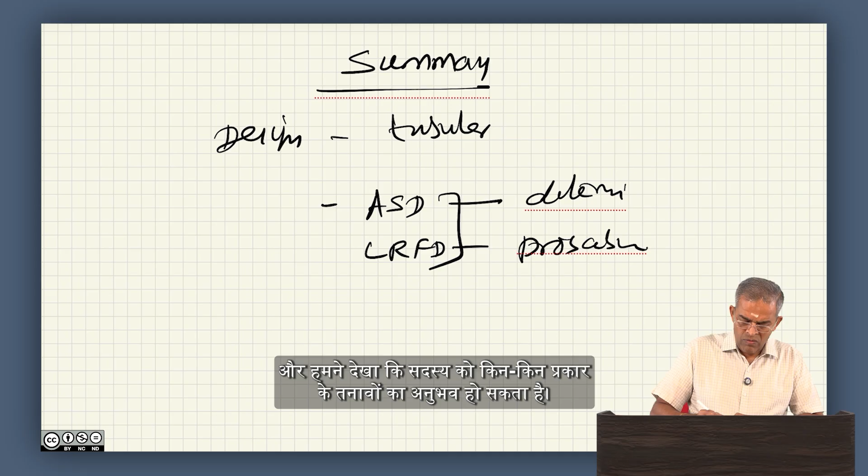So friends, in this lecture, let us look at the summary. We understood the design methods for tubular members. We said there are two design methods which are popular: one uses probabilistic tools or probabilistic methods, one is deterministic. And we have seen the different kinds of stresses which can be experienced by the member, and we also understood how to compute the permissible or allowable stresses in axial tension and axial compression.

So we move forward to understand further bending etc. and shear in the next lecture. I hope you follow this and understand clearly the design aspects which are being followed.

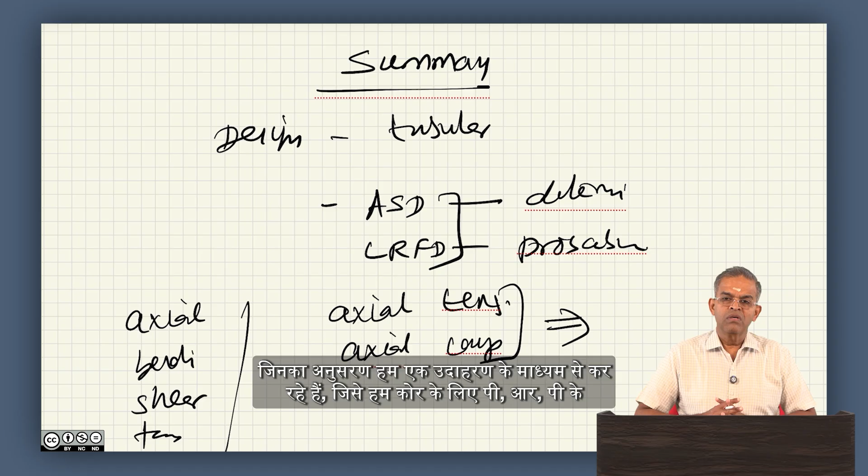By one example which we are using as API-RP2A code, one can also use additional other codes like ABS, American Bureau of Shipping, to compute this. If time permits and details are available, we will test that also. Then we will make a design example and illustrate for the sake of viewers to understand how the design is actually done using this code of practice. So follow the lectures and try to get more information from the textbook referred on the SwayamPrabha website.